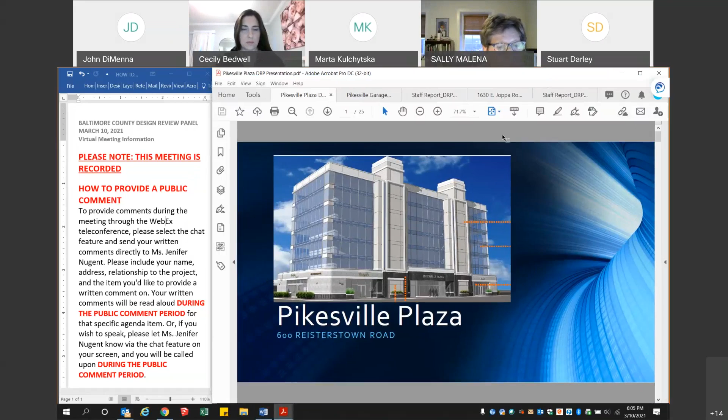Mr. DiMenna, thank you for that synopsis, you saved me a few words since I was going to start with those statements as well. But you're correct, we are here tonight for the site plan and landscape plan, essentially to show how we have addressed comments from the January 13th DRP meeting. Some of these slides are repetitive from that previous meeting, so we can start to scroll through those, Marta, if you'd like. The first is the cover sheet. Next is the project description, which we probably don't need to rehash unless somebody wants to talk about the project description and the existing conditions.

Yeah, Marta, I think we can go directly to the site plan. Slide 9 is existing conditions, 10 would be proposed conditions in a black and white version. It probably would make sense to skip ahead, just because the visuals of the black and white at this scale are somewhat difficult to see. Let's go to the next page. Now that shows the landscape improvements around the site, also in black and white, and again somewhat difficult to read. So we'll go to the rendered versions, which are the next 2 slides, I believe, Marta.

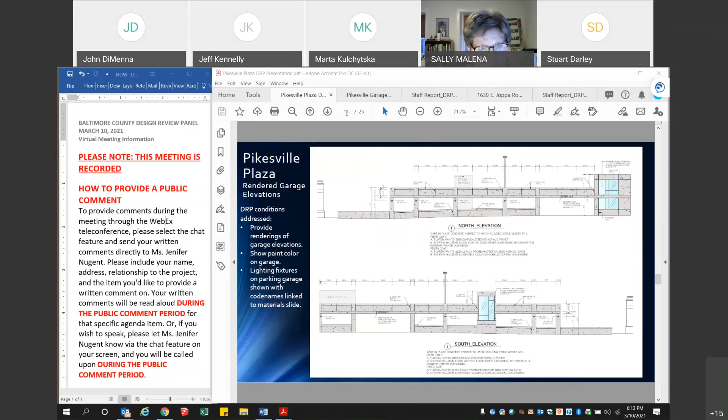The corners of the concrete elements are all going to be chamfered, and we have 3/4 inch reveals throughout the elevations that help break up the flat concrete surfaces.

Next slide. This top slide is a west elevation, along the adjacent properties. Here we have a solid concrete wall on the right half to comply with code because that is so close to the property line.

The bottom slide is the east elevation of the garage, and this upper framing that you see occurs about 28 feet offset from the face of the office building.

You can see we're providing 2 light poles on top of the garage, located about third points, and there are also wall sconces on these elevations as well.

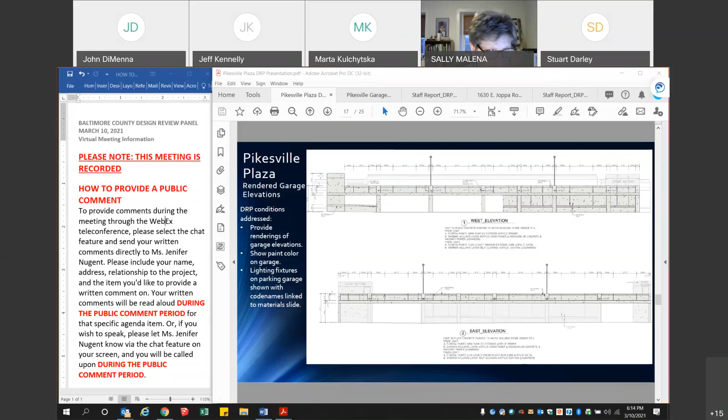Unfortunately, they end up pretty small in these images, but there are 6 on the west elevation located at 11 feet above grade, and there are going to be 5 on the east elevation that'll be 12 feet above grade.

Unfortunately, though, the labeling that we used on this slide does not match the material slides. So maybe, Marta, if you could go 3 slides ahead, I can identify those sconces.

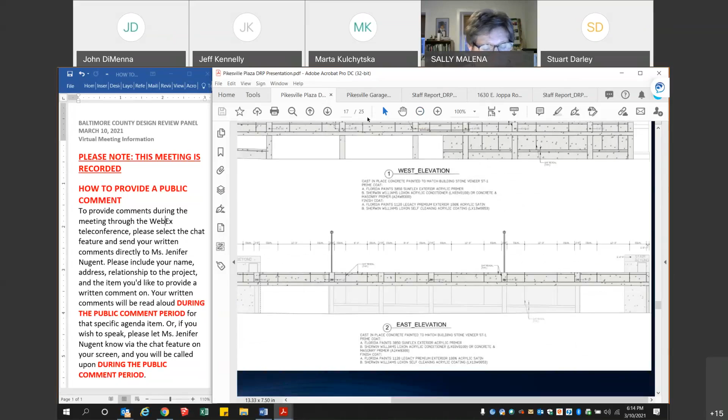Here, the sconce shown in that upper right corner is a sconce that's going on the office building, but it'll also be used on the north and south elevation of the parking garage.

And the one to the left of it, the WDGE2, is the sconce that's being provided on the garage east elevation, facing the office building.

The one below that, the tall rectangular sconce, is only being used on the office building and is not part of the garage at all.

And then the one to the right, the WSR fixture, is located on the west elevation of the garage and will also be used interior at the tops of the stair towers.

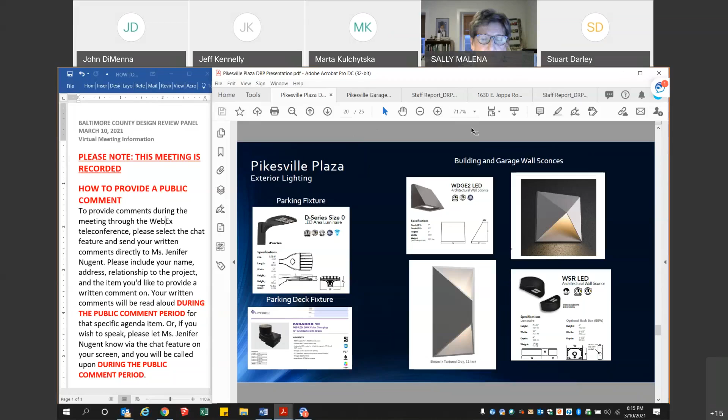You could go back 2 slides now, Marta. So these are the proposed floor plans. The garage is primarily an open air garage, except for the lower level, which is mechanically exhausted.

That bottom left image is the lower level plan. The right half of that parking is all underneath the existing office building.

That parking space is all existing and we're just reusing that space. The ramp is on the far left of that parking area, which takes you up to the ground level.

At the ground level we have 61 parking spaces, which is that middle image. And then the right image is the upper level, where we have another 44 parking spaces.

One of the staff review comments was questioning whether or not there would be any additional signage provided other than the directional arrows that were shown on these plans. And of course, the answer to that is yes, there will be.

We intend to have a signage package that'll provide directional signage for exiting, right turn only or left turn only signs, coordinated with these arrows that are marked on the plans.

There would also be a stop signage where the office lobby main entrance into this garage is, where pedestrians will be coming across the ground floor and entering into it. So there'll be a stop sign at that drive aisle.

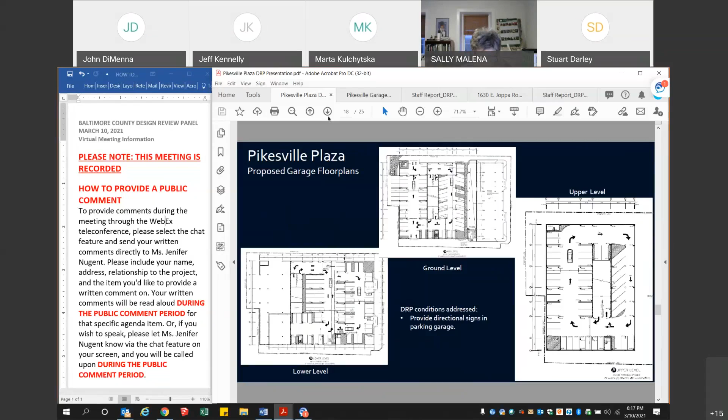Next slide. I guess it's back. I don't know, back to you, Stu, so you can talk about exterior lighting.

Next slide, I think we went through with Jeff, and the next slide after that is again just the building materials and lighting shown on the same page. This is a key for the other documents for treatments of the wall and paint to match items we need to provide.

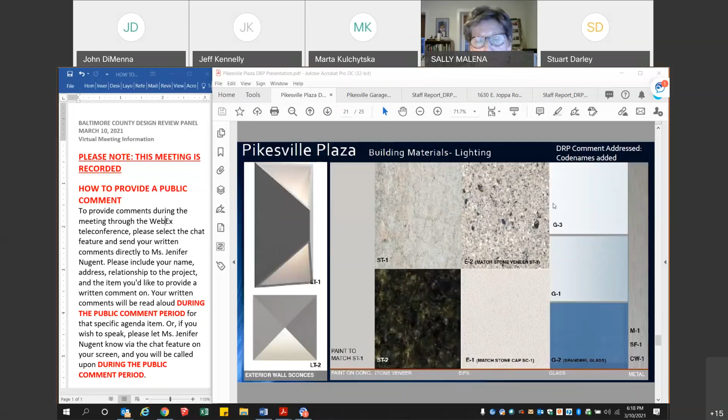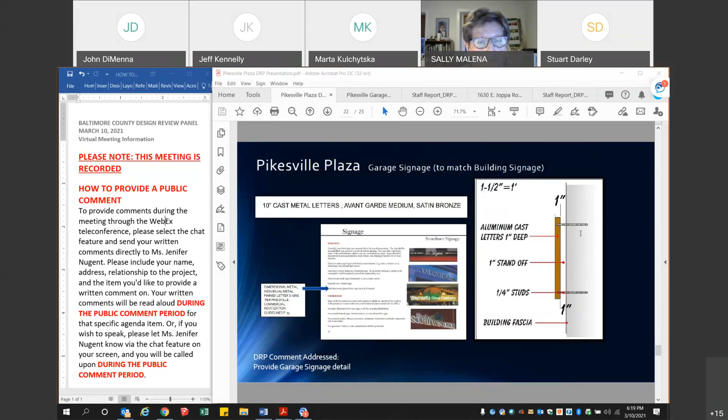Next slide, Marta, is a detail of the low wall. It's an elevation and a section. These walls will be installed on either end of the proposed parking area adjacent to the building addition, in the back of the existing building on the west side. This was requested at the previous meeting, and we're presenting this as a 42-inch high low masonry wall to provide screening of that parking area to the adjoining properties.

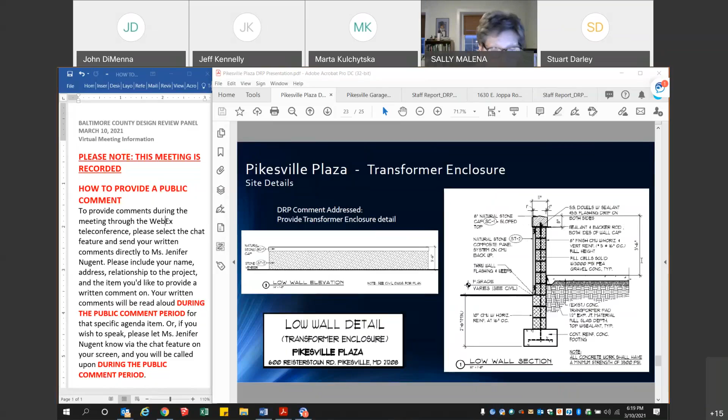Next, Marta, is our dumpster enclosure detail. We're proposing a board-on-board dumpster enclosure, encircled on 3 sides with board-on-board and a gate in the front, which will face Irving Place, with a concrete pad in front connecting Irving Place to the dumpster location. That's a pretty typical detail for a dumpster enclosure, especially of this size, to use the board-on-board option, and it'll be a natural wood color.

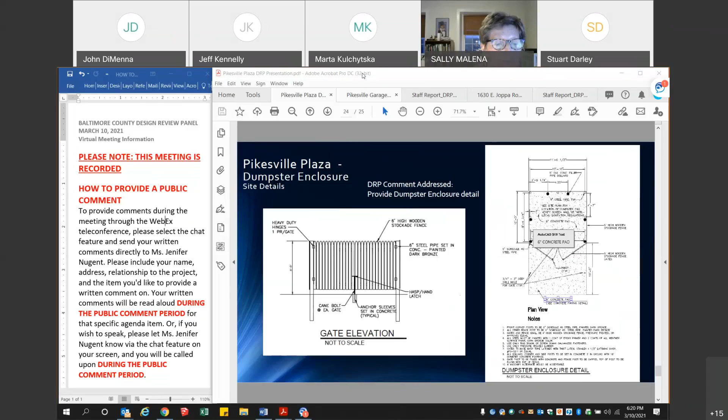Next slide, which I think is our last slide, is just a detail of the concrete sidewalk that will be employed on private property, all within the site. It will be a minimum of 4 inches of MSHA mix number 2 concrete with 2% cross slopes to promote drainage. Sidewalks outside, within the public right of way, that need to be repaired or replaced will be in accordance with the standard county design plate R19 for public sidewalks, which has a slightly thicker requirement — I believe it's 5 inches on stone.

I believe that is our last slide, so I will turn it back to you, Mr. DiMenna, for comments and questions.

Thank you very much. Marta, do we have anyone signed up for the community input portion of this presentation?

We have here Mr. Alan Zuckerberg. He has several questions he sent to me in chat, but I will try to unmute him so he can ask all of these questions.

Mr. Zuckerberg, can you hear us? Yes, I can. So you can speak now, this is time for questions. You have 2 minutes. Okay, thank you.

So my first question is, because of the history of this building and nothing was done of any substance since the last time DRP approval was given, does the DRP have authority to revoke its approval if there is no substantive shovel in the ground, so to speak, by a certain period of time?

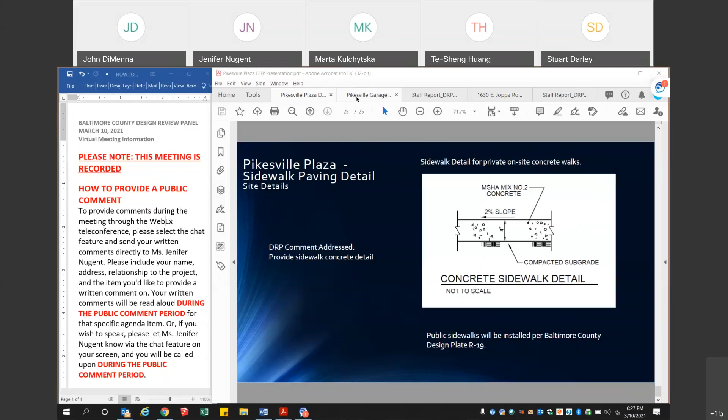Okay, thank you all. With that, we'll begin having the panel. We'll start with Ms. Bedwell. Excuse me, John, can we read our staff report? Oh, I'm sorry, jumping the gun here. That's okay.

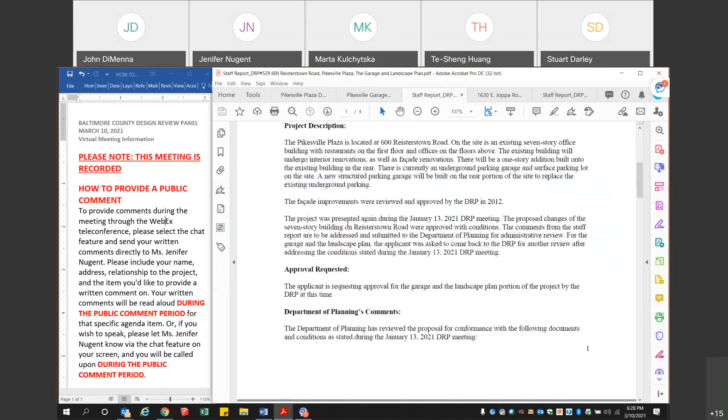We prepared our staff report based on the comprehensive manual of development policies, Pikesville revitalization plan, and Pikesville commercial revitalization guidelines. Can you hear me okay? Can all hear me okay? Yes. If you don't need to speak, could you please mute yourselves? And I'll try to mute everyone also. We also reviewed the project based on the Baltimore County landscape manual.

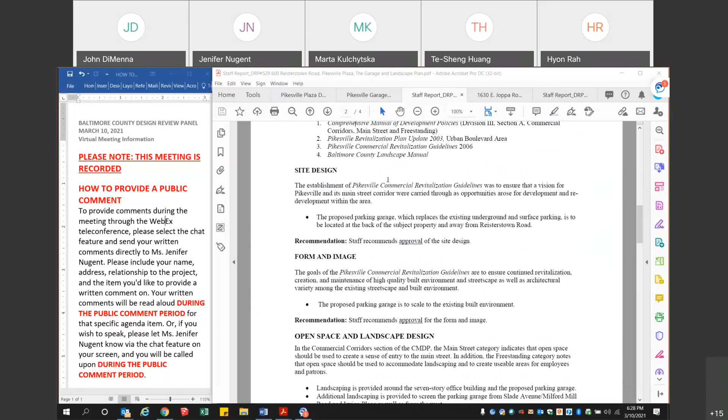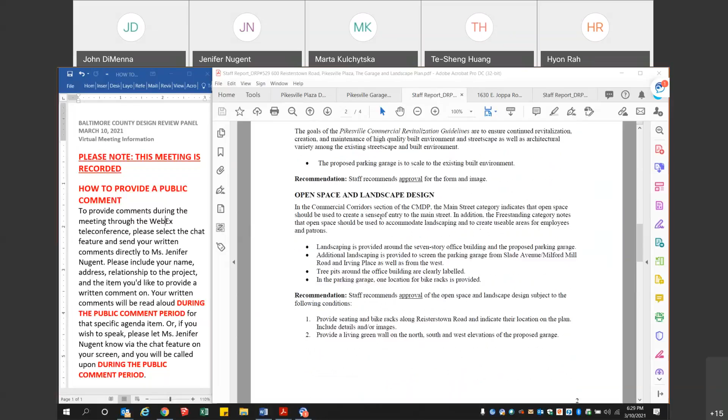Can you hear me okay? I'm sorry, can hear you. Okay. So in regards to site design, staff recommends approval. In regards to form and image, staff recommends approval. In regards to open space and landscape design, staff recommends approval subject to the following conditions: provide seating and bike racks along Reisterstown Road and indicate their location on the plan, including details and/or images. Provide a living green wall on the north, south, and west elevations of the proposed garage.

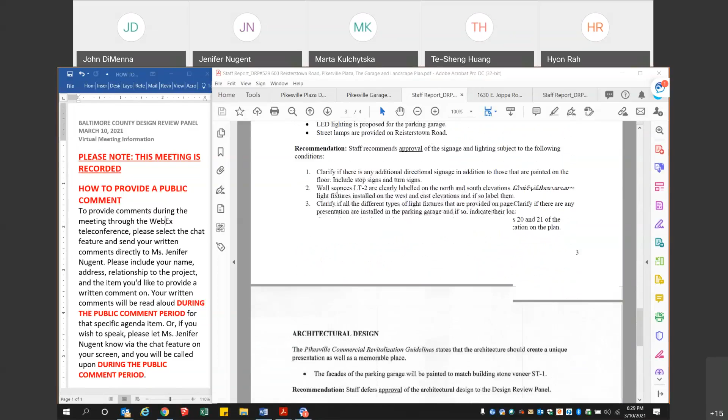In regards to street parking and circulation, staff recommends approval, with one condition: label materials of the proposed crosswalks on the plan. In regards to signage and lighting, staff recommends approval subject to the following conditions. Number one, clarify if there is any additional directional signage in addition to those painted on the floor, including stop signs and turn signs.

Number two, wall sconces LT2 are clearly labeled on the north and south elevations. Clarify if there are any light fixtures installed on the west and east elevations, and if so, label them. Number three, clarify if all the different types of light fixtures provided on page 20 and 21 of the presentation are installed in the parking garage, and if so, indicate their location on the plan.

And in terms of architectural design, staff defers approval of the architectural design to the Design Review Panel. That concludes the report.

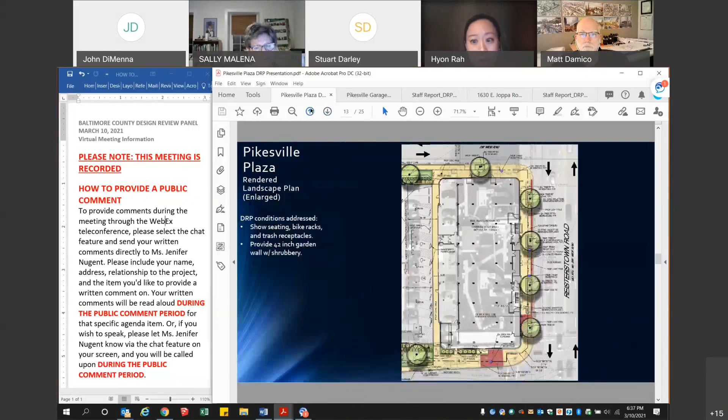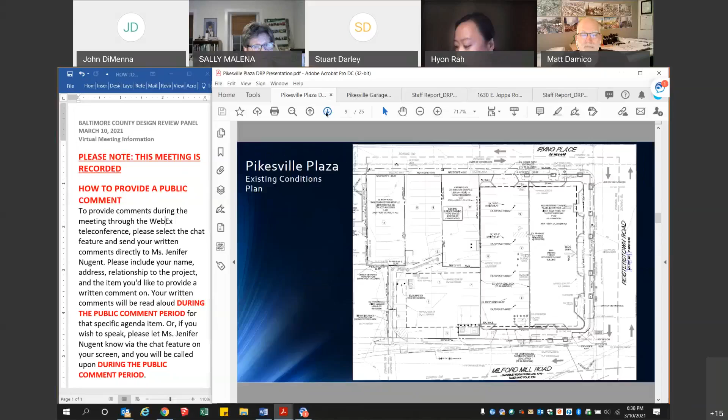So, my first question was going to be about the units because I didn't see the units on the plan, but I think you said it's just foot candle, so I'm assuming it's average foot candle. Yeah, that's correct. It's the foot candle levels shown on the photometric. It's slide 19, Marta, if you need a number for that.

I appreciate that the lighting levels are low enough that it's not going to bleed out to the neighborhood, but I think it's too dark now actually because the lowest numbers are at like 0.1. As you know, IES recommends for small parking lots, commercial is 0.5, and in practicality, 0.25 is pretty much the lowest you should go. So I would really highly recommend that you look at making it slightly brighter, especially for the ones on the perimeter, where it's logging at 0.1. I think it's too dark.

So that's my only comment. Thank you. We can absolutely look at that. I appreciate it. Thanks. Do you have any additional comment? I do not. Thank you. Okay, thank you very much.

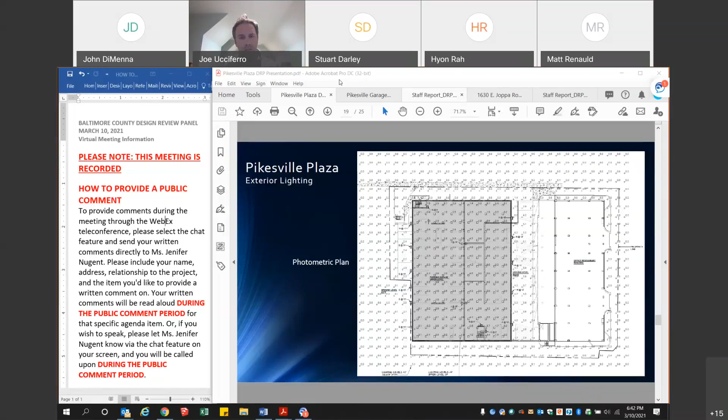If you could reiterate for me, where exactly is the dumpster? Yeah, the dumpster is behind on the far westerly side of the project. The access to the dumpster is off Irving Place. There you go, Marta. Up at the top left corner of the site, you see the yellowish hatching, which indicates some concrete paving, and then the dumpster itself is right in that corner. It's tucked in that corner off the road, about even with the building to the left or to the west. There is the actual location where the dumpster will sit in the enclosure. Okay, thank you.

I have no additional comments. Would any of the panel members like to make a motion?

This is Jenifer from planning. Can I make a statement about our staff report? Maybe that would help please trigger a motion.

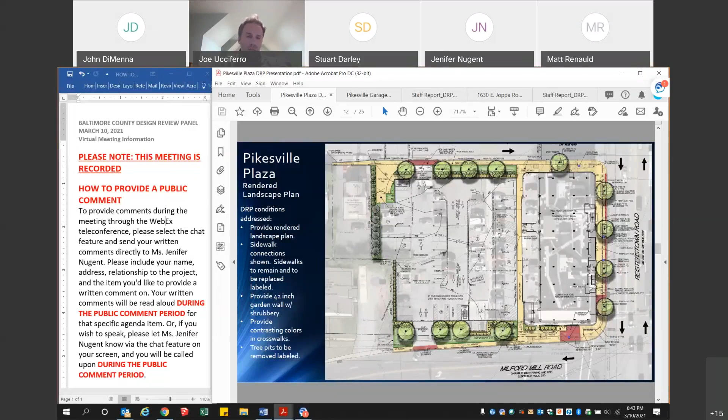The purpose of our making a comment about doing something on the garage is we're now back at a second meeting on the garage itself, because we didn't feel like there was enough information initially when this structure was being erected on this site. This parking lot in the rear of the building, as it stands right now, Marta, if you could go to one of the perspective pictures of the existing condition, the surface lot is very exposed. And to have a parking deck that's going to be visible from Slade and also coming from the north heading south, you're going to see much of that structure.

The thought was to try and help it blend in, as opposed to match the existing building, which is this gray color—it's not very naturalized. I do appreciate that a lot of landscaping has been added to try and screen that garage, but it's going to take a long time for that to fill in. Also, I don't know how painting the garage structure, what kind of maintenance that requires over time. So the thought from planning's perspective was to give it some living planting material, not only from an aesthetic standpoint, but to Ms. Rah's comment as well, to help air quality.

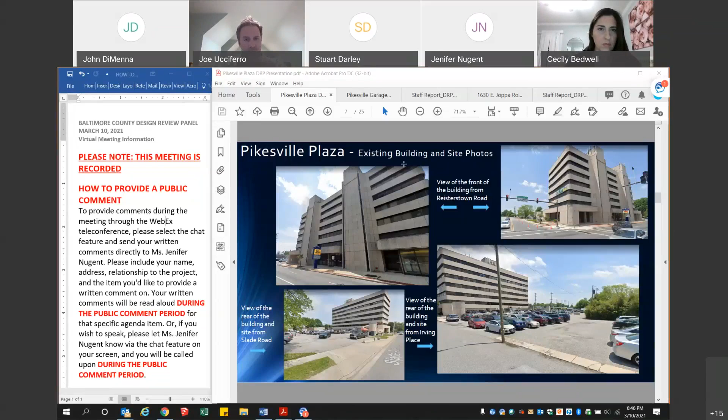We had said north, south, and west. We were really just putting the comment in there to get you all discussing what could be considered. Our staff report, our recommendations to you all—you can take them into consideration or leave them as they are.

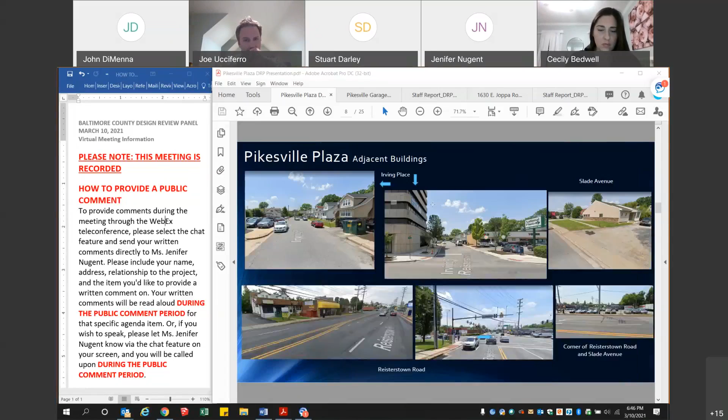Hey John, this is Matt. I think it's a good point being made. I'm not an expert on green walls by any stretch, and I wonder if the concrete and the heat from that, and the different orientations, is it really going to be successful? There's planting width here—I wonder if they would consider putting in, immediately upon installation, taller plant material, maybe even arborvitae in the back or Leyland cypress or some taller evergreen that would accomplish the same thing. That would have the immediate effect, green it, screen it better, hide it. Is that something that could be considered?

And maybe you're right about the color—a warmer, slightly darker color might be worth considering. I don't know, I'm just throwing that out there. I wonder how the panel thinks about that.

Sally, you're on mute. Can you hear me? Yes.

Okay, I would have an issue with a green wall. Number one, it's an open garage, so you have these different walls at different heights—it's not like you have screening of some kind for that plant material. The only thing I could think of would be some kind of ivy growing down the wall, and orientation has a lot to do with it, and maintenance. And I don't see maintenance happening to that level on the site.

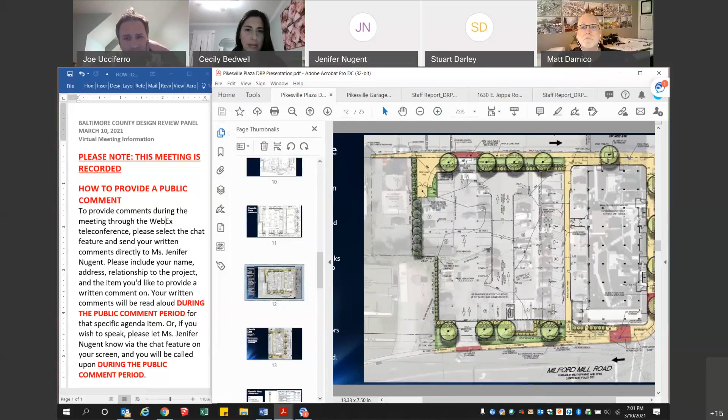I think the purple dots are the trash receptacles, and the yellow dots are the lights. That's right. So where specifically, oh, I see them now. Yeah, there are two. I think the trash receptacles on the top and bottom streets are kind of in the middle of the sidewalks and entry points. And then there's a light on Reisterstown that's directly in front of the center entry doors.

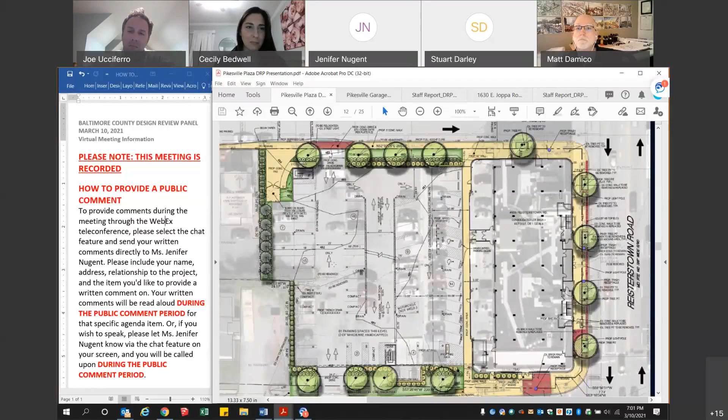I see it. So those should be shifted so they're not within the direct entry exit or on the sidewalk paths, as Matt suggested earlier. And the light poles should be out of the tree canopy. Yes.

Before, can I have a suggestion? Can you make the suggestion more directed, easier to understand, so that way?

Cecily, can you just, like Joe already said, in terms of the staff report, exclude the live green wall, and you also added some points. Can you say it again? Yes, I will try, and I hope my connection's stable enough so that it comes through. If not, someone else can jump in.

So the motion amended would read that the project is approved on condition of coordinating with staff on the following items, inclusive of the staff report, with the exception of requiring a green screen, coordinating on the plant selections to ensure that there's enough screening, that the trees and shrubs are of a large enough size and species to ensure some screening of the garage, to ensure that the minimum foot candle in pedestrian areas is 0.5 foot candles.

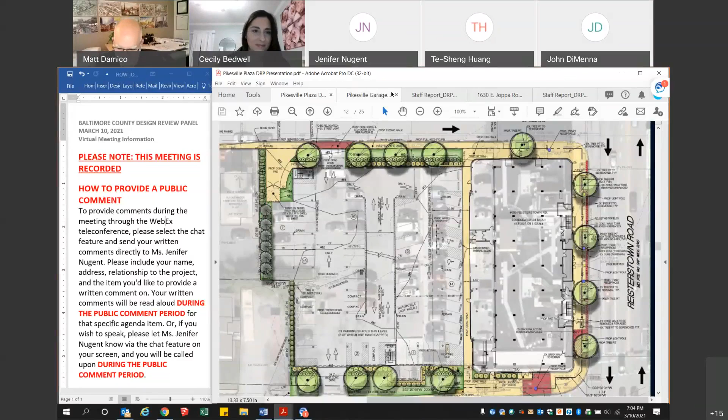With that, we'll move on to our second presentation, which is 1630 East Joppa Road.

Good evening, Mr. Chair, members of the design review panel. This is Tim Kotroco. I hope you all can hear and see me okay. Is that correct? Yes. Excellent. Yes, sir. Excellent. Thank you, Mr. DiMenna. I'm here on behalf of Green Clean Auto Wash.

It's a new car wash facility coming to Baltimore County. They're new to Baltimore County, but they are very prominent in the state of Virginia. They have found a couple of sites in Baltimore County that I'm working with them on, and tonight's presentation is at 1630 East Joppa Road. It's the site of the old Hooters restaurant. Green Clean proposes to tear down the old Hooters restaurant. For those of us old enough to remember, it used to be called Rascals, an old nightclub. But that's going to be torn down and a new car wash facility built in its place.

I have here with me tonight members of our team, Mr. Craig Van Bremen, a principal with Green Clean Auto Wash. He's here this evening. Matt Bishop is going to be doing our presentation. He's with Kimley-Horn, landscape architect, and Kevin Siskowski is our architect. He'll be here to answer any questions you might have. So without further delay, as the night is getting long, I would ask Mr. Bishop if you would go ahead and walk us through the presentation, Matt. Thank you, Tim. Can everybody hear me okay?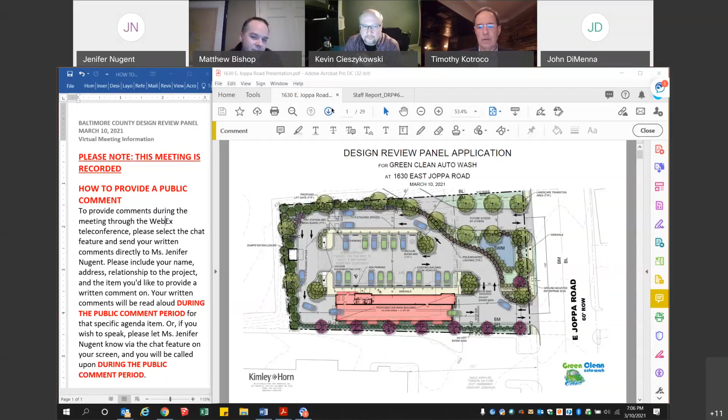I think everybody's seen this package, so I'll breeze through these quickly. The site is a few hundred feet west of the intersection of Loch Raven Boulevard and Joppa Road in the Towson area. The site is highlighted in orange there. It's in the general area of where the newer Starbucks is and the Sonic restaurant across the street, to familiarize everybody.

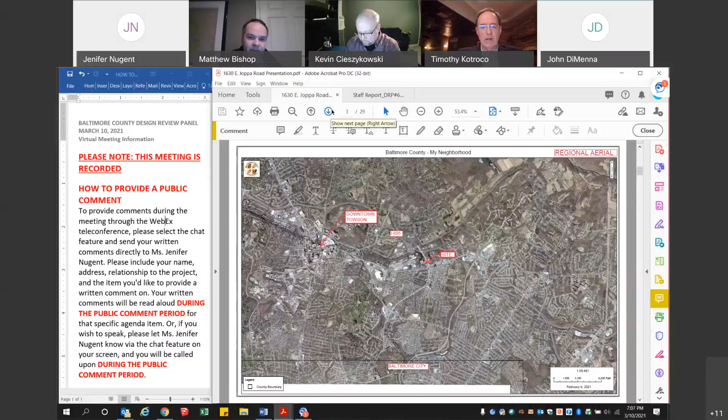Next slide, please. This is just a vicinity map, gives you a general idea of where we are in relation to the center of Towson. Next slide.

Again, just a closer up relationship to 695 and the major thoroughfares. Next slide, please.

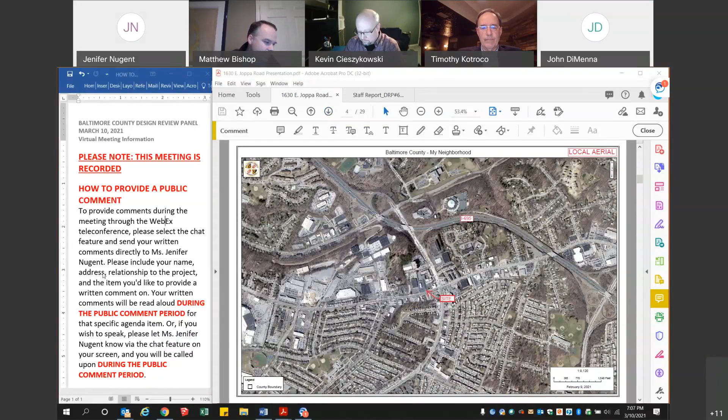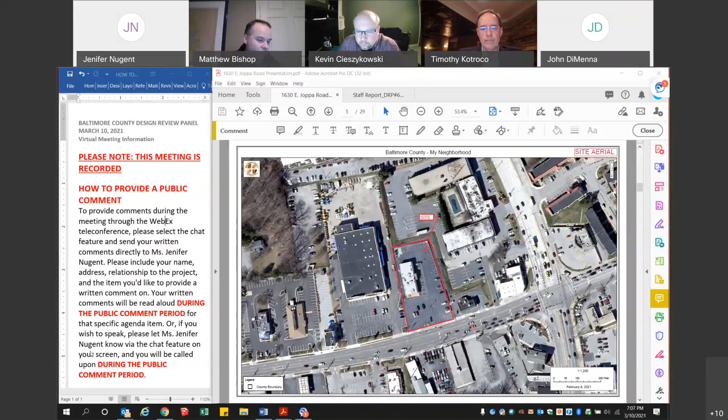This is an aerial photograph getting a little closer, showing the existing conditions. This site is 100% paved. It has a vacant restaurant, as Mr. Kotroco mentioned, and I believe currently it's being used as temporary parking for some automotive use. Next slide, please.

This is a simple bird's eye view from Google Earth showing existing conditions. There are 2 access points off of Joppa Road. We intend to keep the access points in generally the same locations. Next slide.

This is a view from the east looking west. It's a little strange that it's built up a little bit from the adjacent uses to the north and east. You'll see it better in other photos, but there is a slope off site that's just grassed right now. Next slide, please.

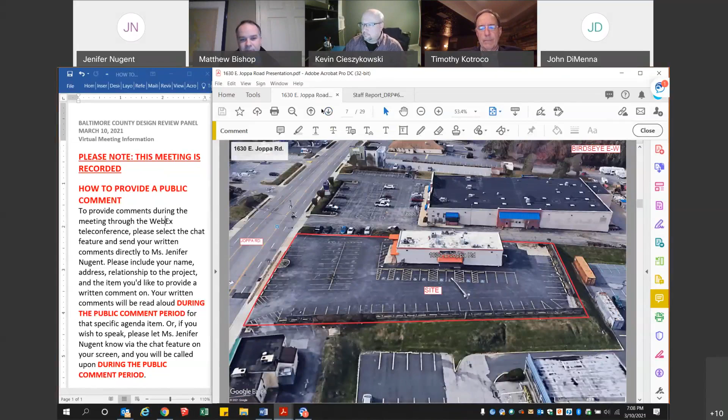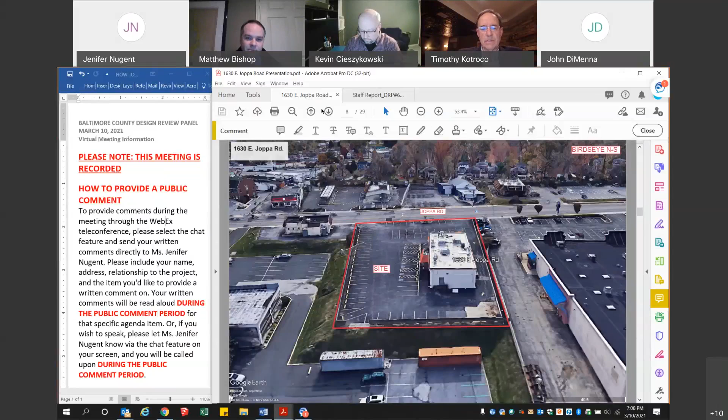Again, looking north and south, the rear of the property. Next slide. And looking west to east. Next, please.

These are street views. It's a pretty barren site at this point in time. Things to point out here: it's all paved, and there is an existing board-on-board fence along the east and north boundaries of the property, and there is actually overhead utilities on the west boundary as well. Next slide, please.

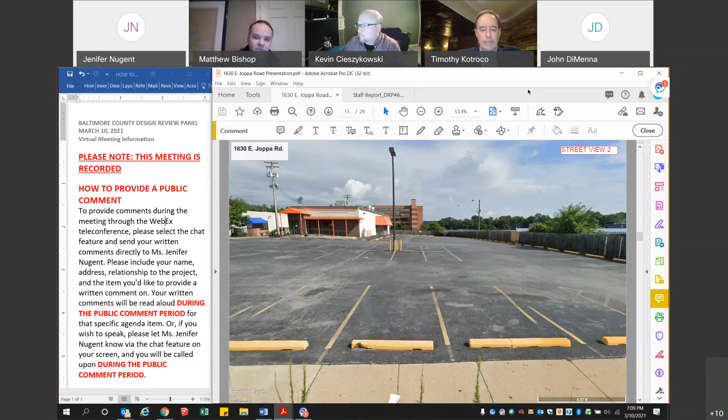Just another view down the street. Next. This is one of our access points on the eastern end of the property. Next.

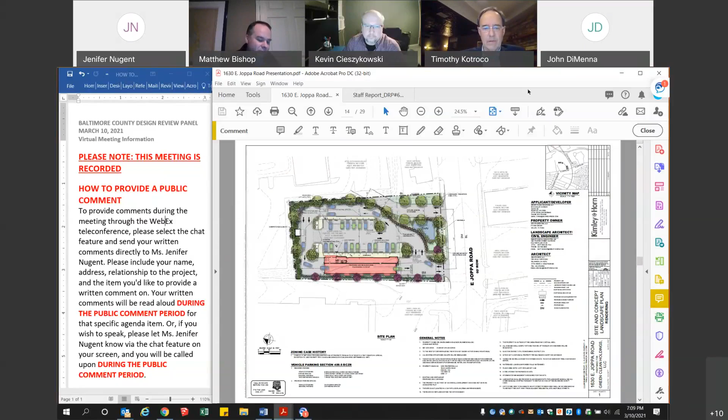This is our schematic landscape plan and plan rendering. We're going to provide all the landscape required by the landscape manual. As you may have noticed in some of the existing photographs, there are no street trees along Joppa Road; we're proposing new street trees. We will upgrade the sidewalk. The current sidewalk is relatively narrow and not in great shape, so we'll increase the width of that to 5 feet, and we'll make a sidewalk connection from our building to the proposed sidewalk.

Thank you, Matt, that's great. Hey Matt, can I interject here for just a second? Please do. Yes, members of the panel, you're going to see a secondary access on this site plan. It says future access by others.

Just to stave off any questions going through your mind about what that is: Councilman Marks, we've been very involved with Councilman Marks on this site, and he asked us if we would provide a means of access to the Days Inn property behind this site. The councilman is very interested in seeing something happen with that Days Inn site, and he asked if we would be kind enough to provide some means of access to that property in case they needed it. I just wanted to explain that it has no access to our property at all—it's to help the future development of the Days Inn property behind us. I just wanted to add that.

Go ahead, Matt. Sorry, I appreciate that. Thanks, Tim. Also related to access, you'll see that our access for the actual car wash is on the western end of the site, utilizing roughly the existing access point there. You'll come into the site, pull right, and circulation will bring cars into a dual lane, where you'll pay at a kiosk on the planned northwest corner, and then wrap around into the tunnel of the garage or the car wash, and pull through.

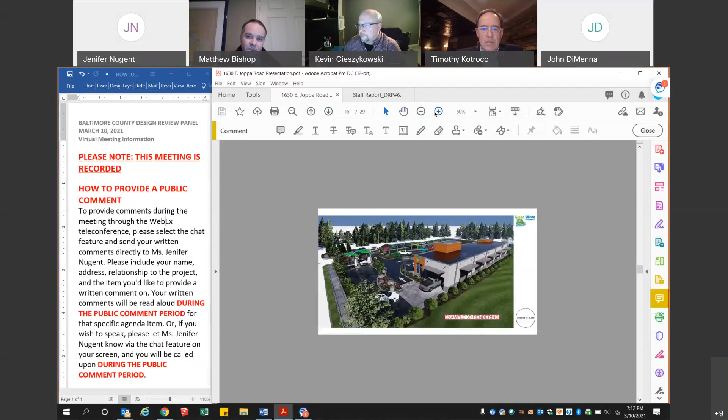Next slide, please. So what we have here is a few example perspective renderings. This isn't our site exactly, but it's a similar one that was built recently. It gives you a general idea of the circulation, the materials of the buildings, and the landscaping.

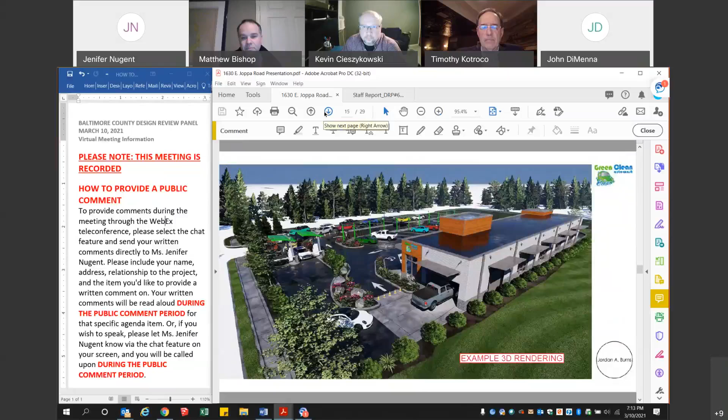Go to the next slide. Thank you. Just another perspective. It shows you the idea of how the vacuums work, and again, how some of the building details are and the materials. Next slide.

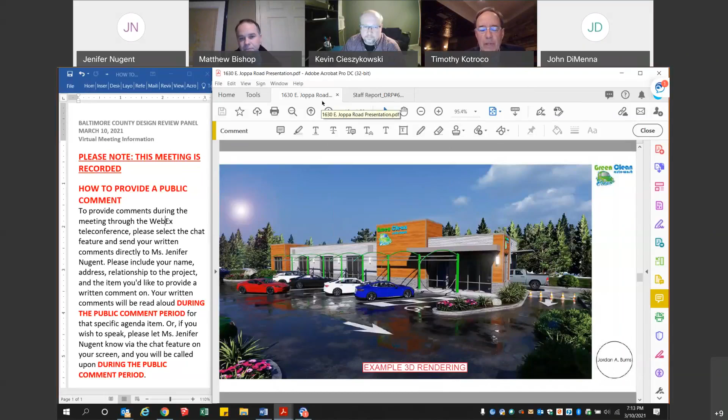Can I interject? If you look at the vacuum facilities, they don't have separate canisters at each station. It's one central pipe system, so there's not a lot of noise at each parking space. It's a central pipe system that handles the vacuum.

Thank you. Next slide. These are simple elevations showing, again, windows and architectural details. I'll let Kevin go into that a little bit in the next slides. Next slide, please.

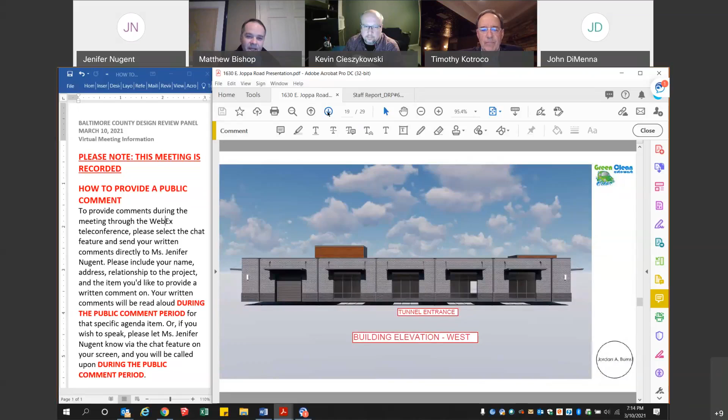This is the end of the building exiting. Next slide. And then, Kevin, I turn it over to you if you'd like to talk about any of the details of the architecture. We have some slides about lighting and some slides showing a little more detail on the building materials. Okay, I guess I'll talk primarily about the building materials.

The block construction you see in the renderings and the views is an EP Henry product. Don't let the renderings make you think it's like a CMU or split-face block. It's a real nice material, with color and texture. I think in the presentation, maybe page 28, it kind of shows that material.

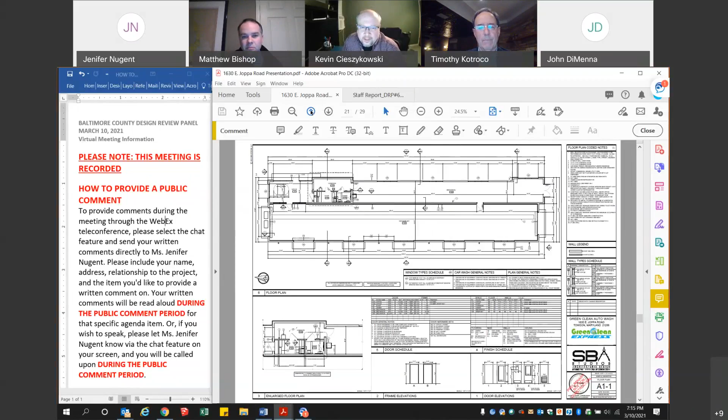And then the material you see that looks like wood, that's a product called Nichiha. It's a very durable, tough product. It looks really nice, and these renderings nail it as far as what that material looks like. The canopies you see are constructed of aluminum, so they're not going to deteriorate or fade in color over time.

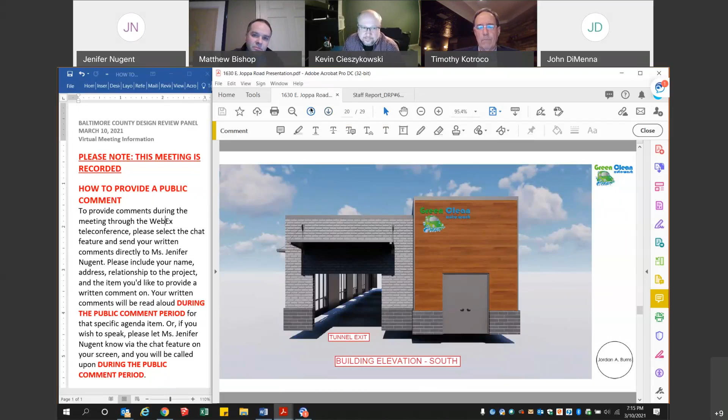And then the glass is standard storefront windows, typical of what you see in most commercial buildings here. So that's kind of my take on the materials. And then the form, this is our model building, which has been working great for us so far. I guess I'll leave it at that. If there's any additional questions on architecture, I'm happy to answer them.

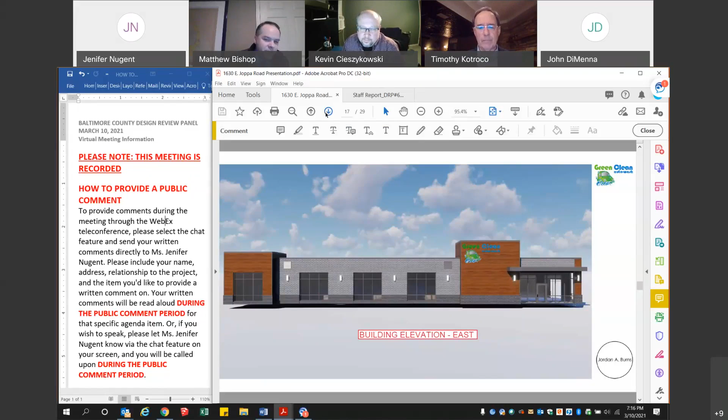Okay, thank you. Marta, has anyone signed up to speak for this project? No, we don't have anyone. Brad, Emre, do we have anything in chat? No, Marta, no. Jen, do we have anyone for chat? No. Window? Nope.

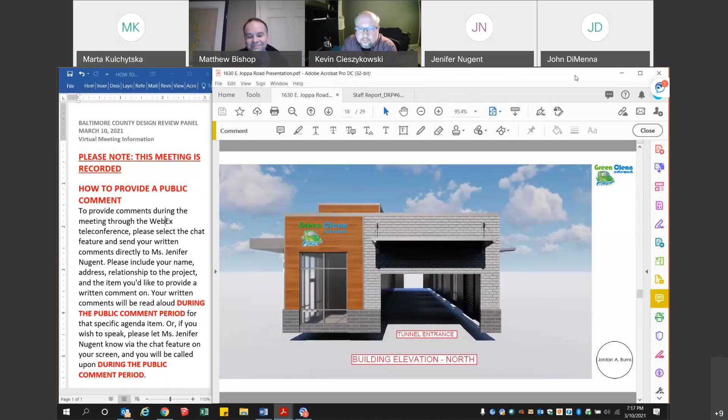Can you hear me okay? I'll try to mute everyone. Is that better?

We prepared our staff report based on the Comprehensive Manual of Development Policies, the Baltimore County Landscape Manual, and the Baltimore County Master Plan 2020. In terms of site design, staff recommends approval subject to the following conditions: number one, provide cross sections to demonstrate the relationship with adjacent properties on the east and west sides, and for the connection of the proposed second access to the adjacent property to the northeast.

Number two, there is an existing bus stop on East Joppa Road. Coordinate with the State Highway Administration and provide improvements for the bus stop, such as a bench and/or an enclosure.

In regards to architectural design, form, and image, staff recommends approval subject to the following condition: number one, indicate on the plan if any rooftop equipment is proposed, and if so, clearly label it on the plan and show how the equipment will be screened.

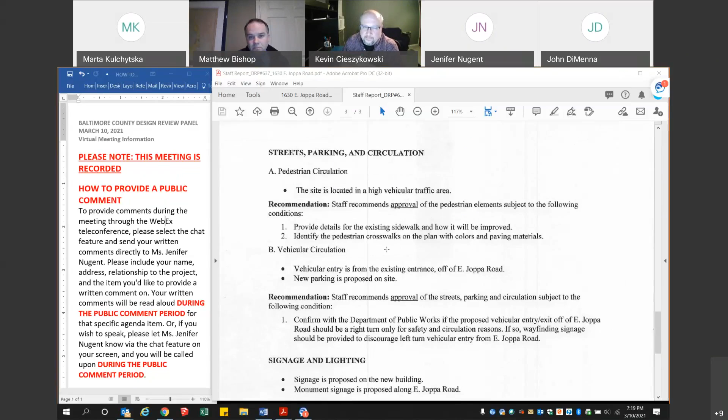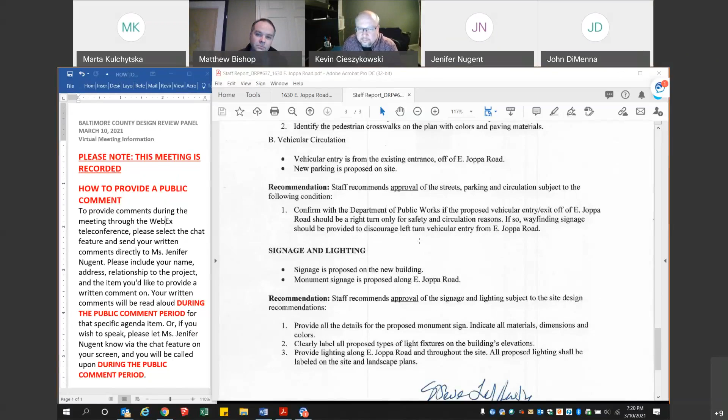Staff recommends approval of the streets, parking, and circulation subject to the following condition: confirm with the Department of Public Works if the proposed vehicle entry/exit on East Joppa Road should be right turn only for safety and circulation reasons. If so, wayfinding signage should be provided to discourage left turn vehicle entry from East Joppa Road.

In regards to signage and lighting, staff recommends approval subject to the following recommendations: provide all details for the proposed monument sign, indicating all materials, dimensions, and colors. Clearly label all proposed types of light fixtures on the building's elevations. Provide lighting along East Joppa Road and throughout the site, and all proposed lighting shall be labeled on the site and landscape plans. This concludes our staff report.

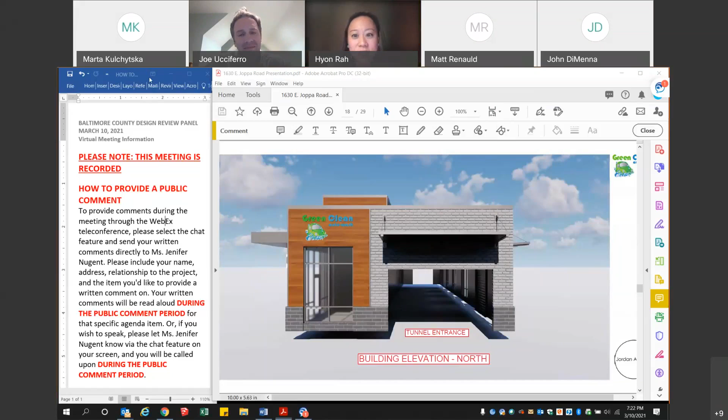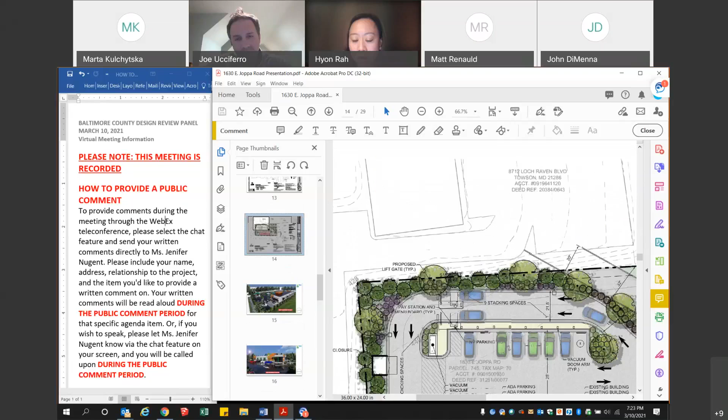It's just a minor comment. Where you enter from East Joppa Road, there are two stop signs for going in and out for the cars, but if you're walking on that road without planning to go into this car wash, it seems to be slightly tricky right here, depending on what the view is like of the drivers, especially the one coming down from the top, if I'm making sense, if you're walking and crossing over. So I just wanted to make sure there are no safety concerns because of the vegetation blocking the car's view for the pedestrian that might be crossing over here. That was just the only comment.

As for, so it's called Green Clean Auto Wash, so does that mean the wastewater treatment and the chemical usage and so on is responsible?

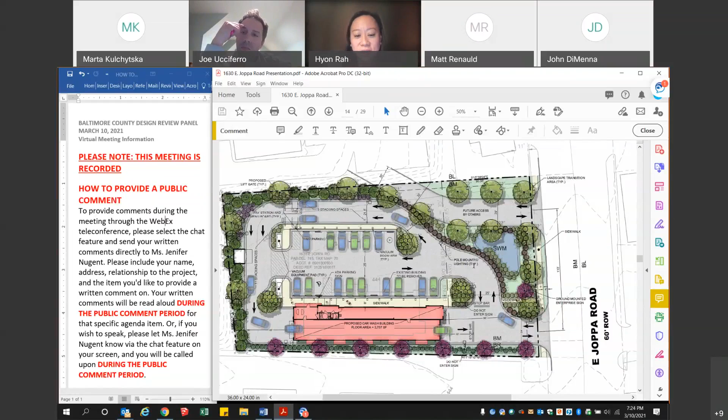Yep, yeah. So we do the best that we can to be as environmentally friendly as possible. All of our soaps and detergents are completely biodegradable. We obviously reclaim all of the water that comes off the cars. We do our best to actually reclaim that water and then use it in portions of our wash where we can. We do upwards of anywhere from 50 to 80%, just depending on how fast the car wash is running at that time, but we recycle as much water as we possibly can.

Great, thank you. I was going to ask about that because it might have space issues as well, depending on if you need to get sludge trucks and things in and out of there. So I have no further questions, and thank you.

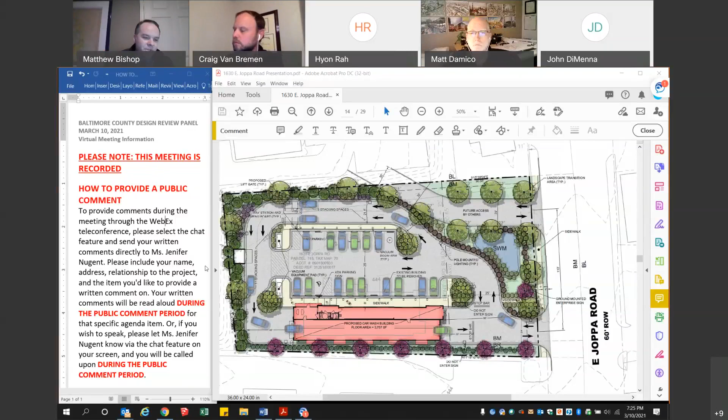I noticed a couple of locations with ground mounted enterprise signs. Are those included in this package—what they'll look like, height, material, whether they're lit? There is a detail in the package showing the ground mounted enterprise sign, on one of the architect's detail sheets, I believe page 23.

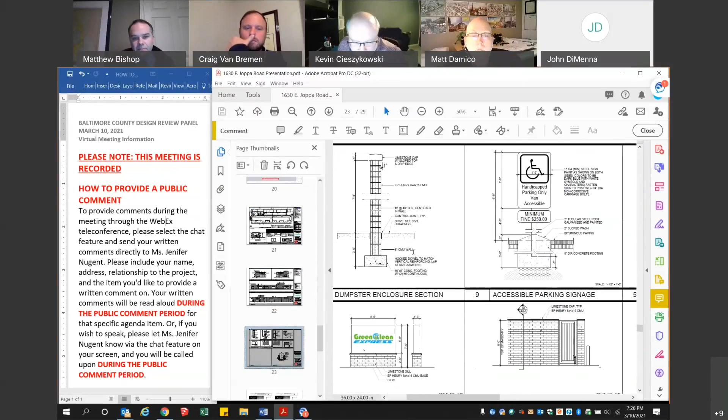It's the same block material used on the building, so it conforms and relates to the building. Okay, I see, so it's 5 feet tall. Okay.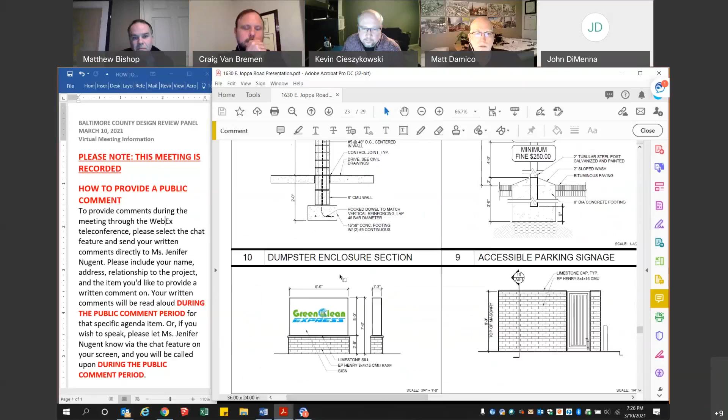I'm assuming that meets the county sign guidelines. I'm not an expert on that. So I do have one question, and I've asked this before for other projects.

One of the goals of these older commercial corridors is to minimize the number of curb cuts up and down the street, to improve flow, access, and pedestrian safety. Have you considered using one curb cut and access point for this as well as the adjacent property, or do you absolutely need both?

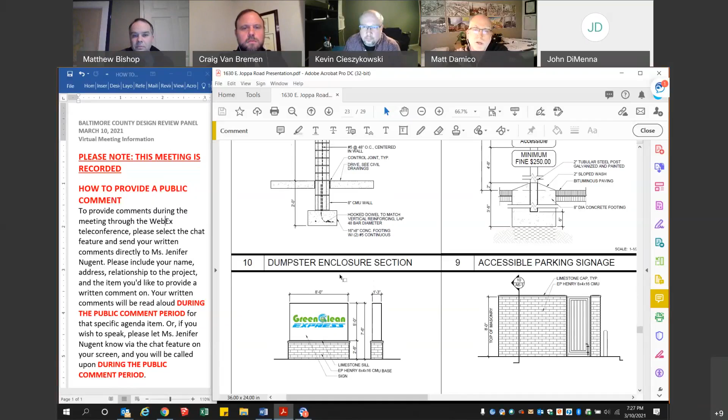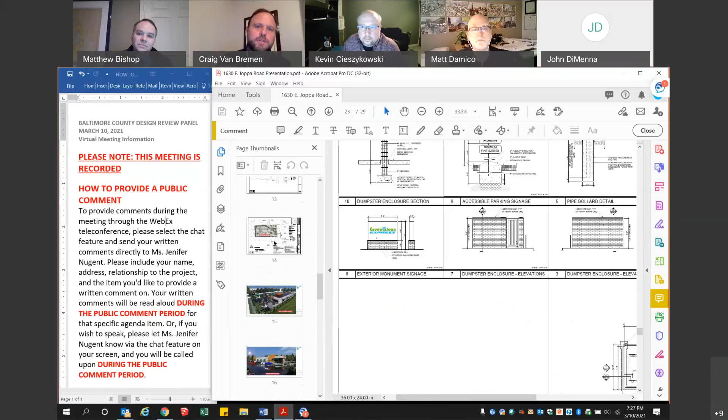Go ahead, Matt. To provide access to the other parcel, as the Councilman requested, we really do need our own separate entrance. With our operations, having traffic entering and potentially going to that existing site would be difficult. And I'd add, we don't even know what the other adjacent use might be in the future, so it's hard to commit to having them come through our site, not knowing how much traffic they may generate.

And I believe we have two access points now, Matt. Is that what the Hooters has now? That's correct, yes. The western end access point is in the same location. The eastern end, we slid over a little bit to get a little better turning movement for curb radius.

All right, no, I understand. Part of the goals of these commercial corridors, like I mentioned, is to minimize that and improve access management, circulation, and safety. So I had to ask it, but yeah, I know you have two of them there already. All right, thanks John, that's all I have.

Okay, Matt, thank you. Ms. Bedwell. Cecily, do you have any comments? Thanks, sorry, I think I froze there for a second. Hopefully I can get through these. I thought one question was the bus stop.

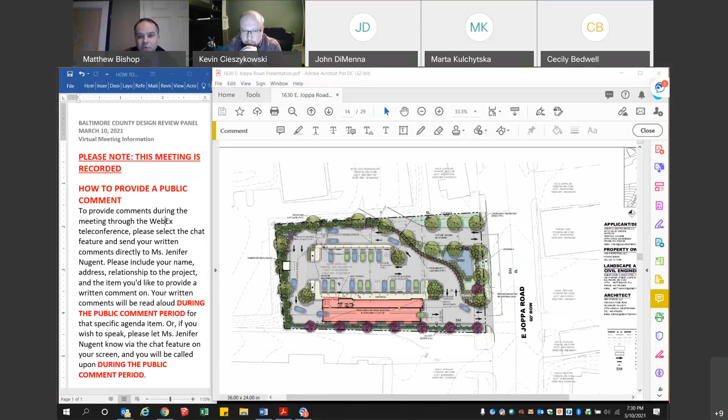Can the staff tell us where the bus stop is? It's approximately in this location—can you see my mouse? We're right in the middle there. Okay, right somewhere here.

Again, we're not opposed to doing something. We'd be happy to work a solution out there to provide some amenity for the bus stop. Yeah, I think if at the car wash they need that transportation, it would serve everyone well if that is attended to.

I echo the comment that Matt had about the containment. I always like to see when we can connect to other sites to not have that single circulation to Joppa Road and back out. But I understand the circulation and queuing for this make it impossible, and I understand you're working with the council member to connect to the other site. So we'll leave that be.

One question I had that I think can help is the continuity of Joppa Road and the pedestrian experience, although you're maintaining those two entry points off Joppa Road. I would like to see the sidewalk material—I think your interior paving is maybe asphalt, I'm not sure, and that sidewalk material is probably concrete—but it would be good to continue the sidewalk material across those entry throats, the driveway entry throats into the property, to at least continue the pedestrian experience along Joppa and give a cue to drivers that there are pedestrians crossing at those points.

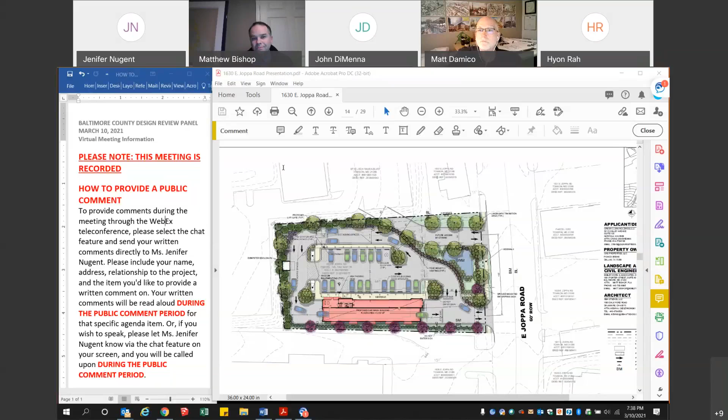Okay, I had asked for a second. Do we have a second? A second from John, motion also, thank you. Cecily, okay. All right, so we'll take that as Hyon Rah making the second. Yep, thank you. Okay, all in favor? Aye. Aye. Opposed?

Great, thank you all very much for your presentation tonight. Very nicely prepared. With that, I'd like to make a motion to adjourn.